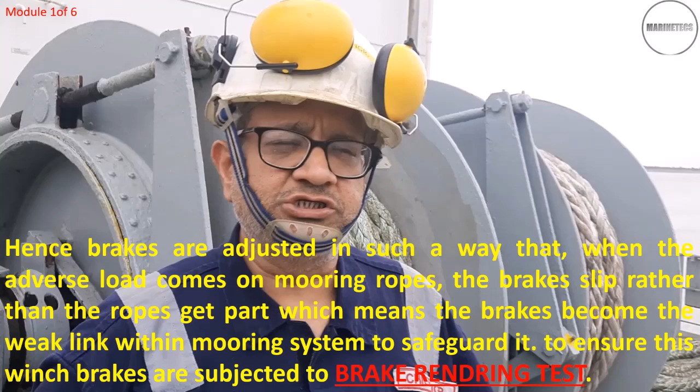As we know, onboard mooring winches are always designed in such a way that they keep your ship in a safe position, and when an adverse or excessive load comes on the mooring ropes, the brake slips rather than the rope getting parted. So these brakes are adjusted in such a way that when this fluctuating or maximum load comes on the ropes, these brakes will slip off rather than part the rope.

So what is winch brake rendering test? Winch rendering test is a calibration of the winch brakes corresponding to minimum breaking load, or also called minimum breaking strength of the rope used in the designing of mooring equipments. This minimum breaking load is also called SDMBL, Ship Design Minimum Breaking Load.

Why is it important to carry out this test? This is done to prevent accidents, to prevent damage to the mooring equipments, and to prevent fatalities if the mooring rope parts.

Module 2. In this module, we will learn about various loads influencing the winch brake rendering load as well as the winch brake holding capacities. These loads are SDMBL (Ship Design Minimum Breaking Load), MBL (Minimum Breaking Load), Design Maximum Brake Holding Capacity, Operational Minimum Brake Holding Capacity, and Winch Motor Rendering, which is also called Maximum Stall.

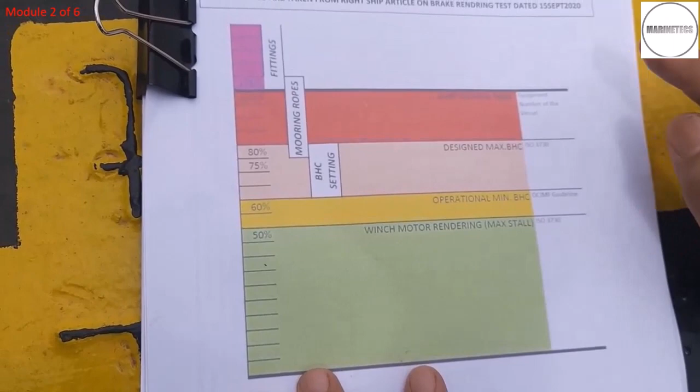Before going for the actual rendering test, we will discuss various loads which govern your winch brake rendering load as well as the winch brake capacity. So the first thing we will discuss is the ship design MBL, also called SDMBL, Ship Design Minimum Breaking Load.

I repeat once again, when the ship is at design stage, class assigns the equipment number to every ship. Then the mooring equipment arrangement manual is prepared, under which this equipment number and ship design minimum breaking strength or minimum breaking load of the rope is mentioned. This minimum breaking load or minimum breaking strength of the rope is the strength of the rope which is used in designing the mooring equipment.

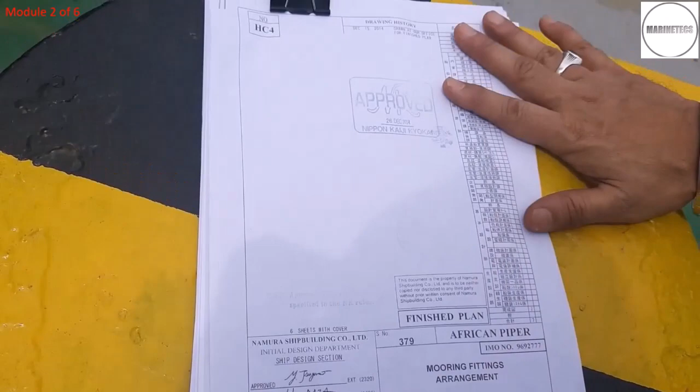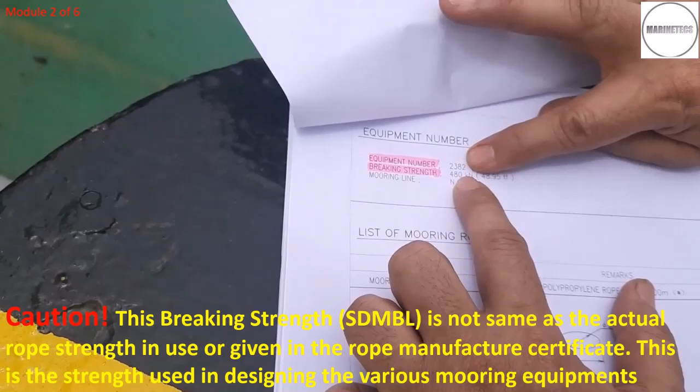So let's have a look. This is the mooring fitting arrangement manual. Here if you turn over, you will find that the equipment number is given here, that is given by the class, and the breaking strength of the rope is given here, 480 kN. You will always find that this minimum breaking strength is not the same as the actual strength of the rope.

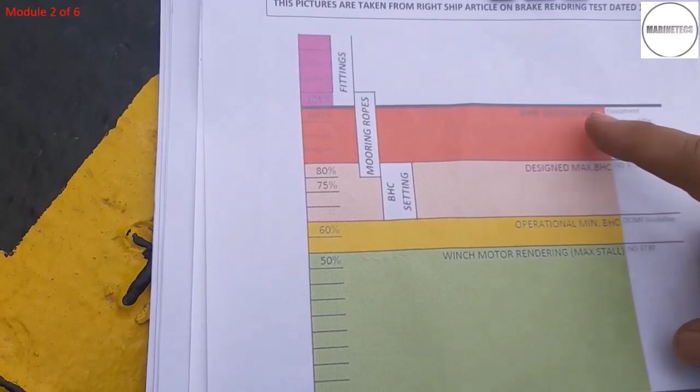This is the strength which is considered for designing the various mooring equipment. Now you will see that in this mooring equipment manual, for each and every fitting, the safe working load is mentioned, the factor of safety, and a lot of things are mentioned in that. Now we understood what ship design MBL is - the minimum breaking load or minimum breaking strength of the rope which is used in the design. We have seen that it is mentioned in the mooring fitting arrangement manual.

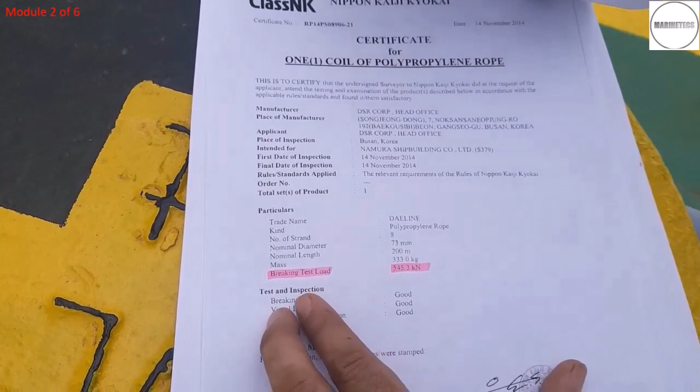Now we go for the MBL. MBL is the minimum breaking load of the rope. This is the load at which the ropes are tested. We can find out this MBL from the mooring rope certificate. This is the mooring rope certificate, and this is the breaking test load, given by the manufacturer. When we talk about MBL, generally we refer to this breaking test load.

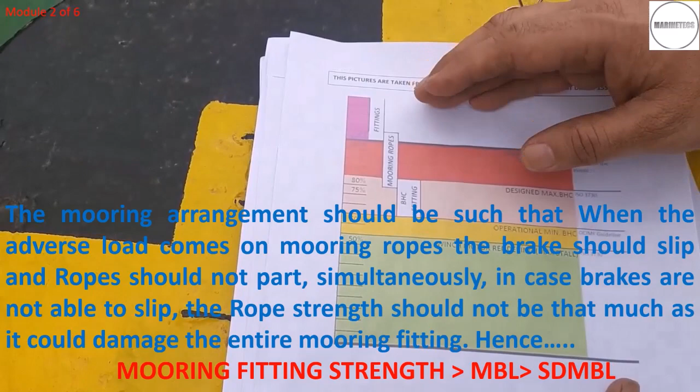Now the relation between the ship design breaking load and the mooring rope MBL is that the mooring rope MBL is almost 5% more than the ship design minimum breaking load, and it can be more than 105%, but it will never be more than the breaking strength of the actual fitting. Because what we need is that when excessive or adverse load comes on the mooring ropes, the brake should slip and the rope should not part. Simultaneously, the rope strength should not be such that the entire fitting fails. So the rope strength is always kept below the strength of the mooring fitting.

Now next is the design maximum brake holding capacity.

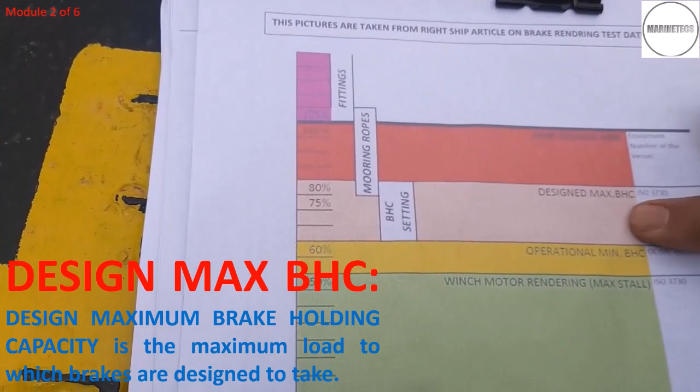The relation between ship design MBL and design maximum brake holding capacity is that this maximum BHC is 80% of ship design MBL. This design maximum BHC is given in the mooring winch manual.

This is the mooring winch specification, and we see the brake capacity of the first layer. This brake capacity is always mentioned with respect to the first layer of the rope which is on the drum.

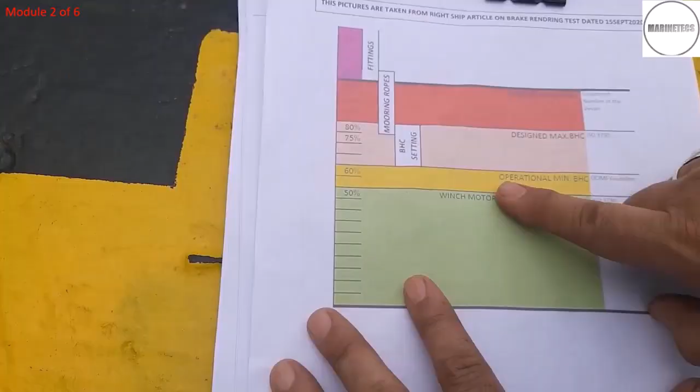This is the operational minimum brake holding capacity. What is that? This is actually the limit of the rendering load. Up till that the brake will hold, and beyond that, if the load reaches, the brake will start slipping.

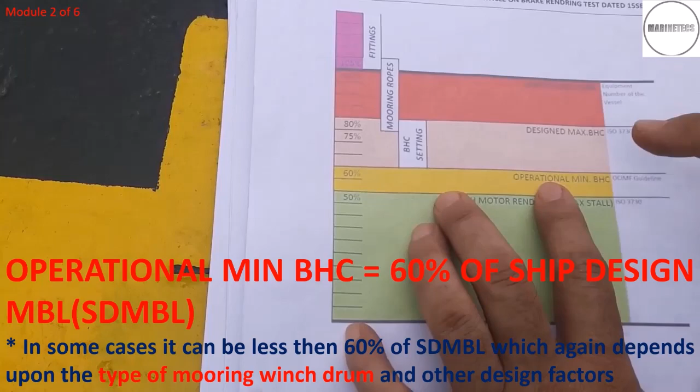This minimum brake holding capacity or rendering load is generally in the range of 60% of the ship design MBL, ship design minimum breaking load. I repeat, it is 60% of ship design minimum breaking load and not 60% of MBL, because MBL is always higher than the SD MBL.

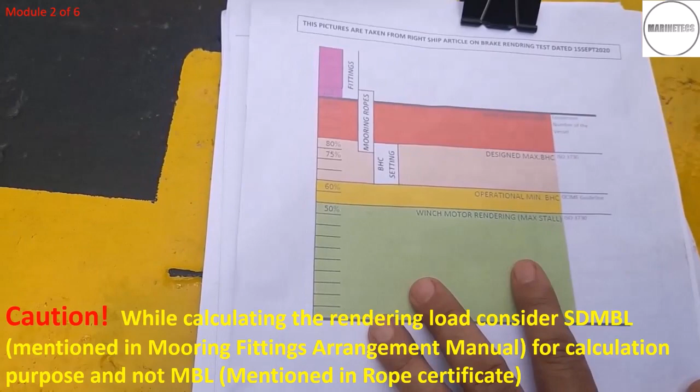Many people make mistakes when they calculate the rendering load. They consider the rope strength, and there the tests go wrong. So we have to take care that instead of considering the breaking load provided by the rope manufacturer, we have to take ship design minimum breaking load, which is mentioned in the mooring arrangement manual.

So next is the winch motor rendering. This is actually the winch motor capacity. Generally you will find a relation between maximum brake holding capacity and this mooring winch load.

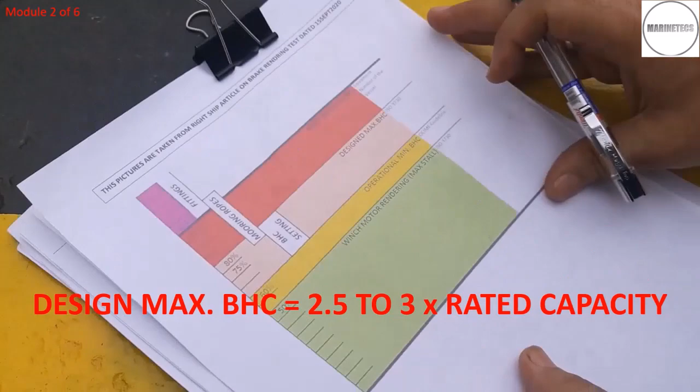These two loads, you will find that this load is almost 2.5 to 3 times of the winch motor capacity. So suppose my winch motor capacity is 98 kilonewton, we will see that it is almost in the range of...

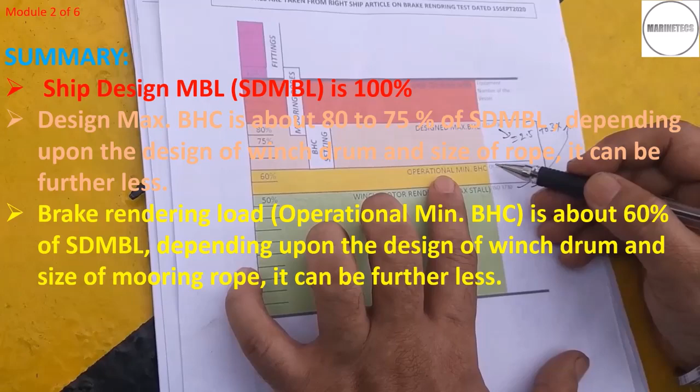So now we have seen various relations: ship design MBL we consider as 100%, then the brake holding capacity of the brake, which is around 80 to 75% of ship design MBL, then the brake rendering load, which is almost 60% of this ship design minimum breaking load, and the winch motor capacity, which is 50% of ship design minimum breaking load, and mooring rope strength is almost 5% more than the ship design breaking load.

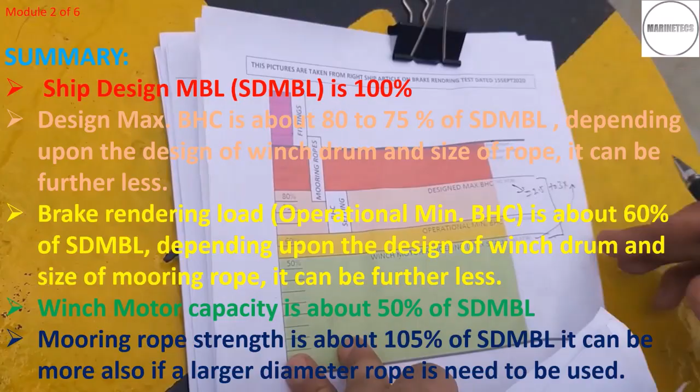So next we will move to the calculation part, how we calculate rendering load.

Module 3. In this module, we will learn about the difference between split drum mooring winches and non-split drum mooring winches.

Calculation for calculating rendering load, which is nothing but the calculation of jack-up force and hydraulic jack pressure used for carrying out the rendering test.

Before switching over to the calculation part, we must ensure what kind of mooring winch drum it is, because calculation of rendering load depends upon the type of mooring winch drum.

As we know, there are two types of mooring winch. One is the divided or split drum mooring winch. Another is the winch which has got the undivided mooring winch drum.

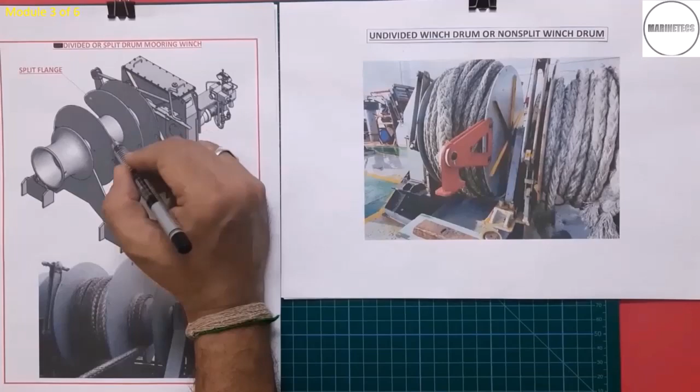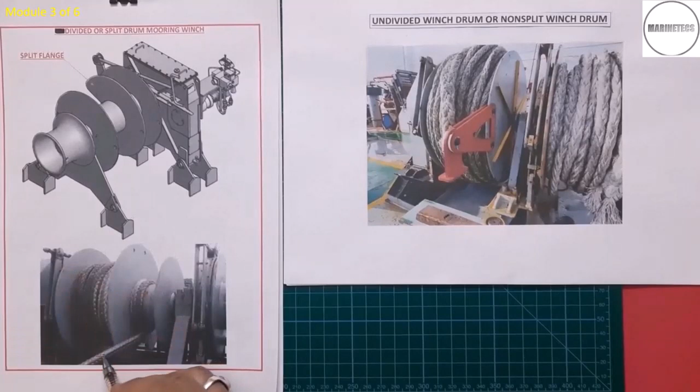In split drum mooring winches, the whole drum is divided with the help of a split flange into two parts. One part stores all the layers of the rope, and the same rope passes through the cut in the split flange, and only a single layer is stored on the other part, and then this rope passes through the fairleads and other mooring equipment, and this span is used for mooring the rope alongside the jetty.

Now in the undivided winch drum, we can see that a number of layers are stored on the whole drum. In this photo, you can see there are two separate drums on a common shaft run by a common motor, but these are not divided drums. This is a single drum, but two single drums on a common shaft.

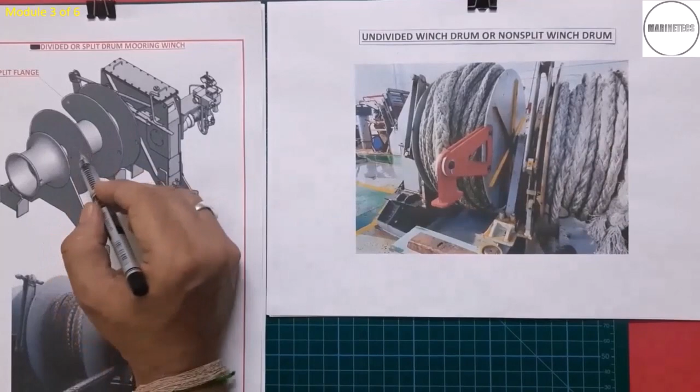Here, this whole drum is divided with the help of a split flange. So this is the common difference between a split drum mooring winch and a non-split drum mooring winch.

Now let's go for the calculation of jack-up force and hydraulic jack pressure in detail.

Rendering load calculation for both the mooring winches are different. In this video, you will understand why the calculation for both the drums are different and why the same calculation cannot be used for both types of mooring winch drums.

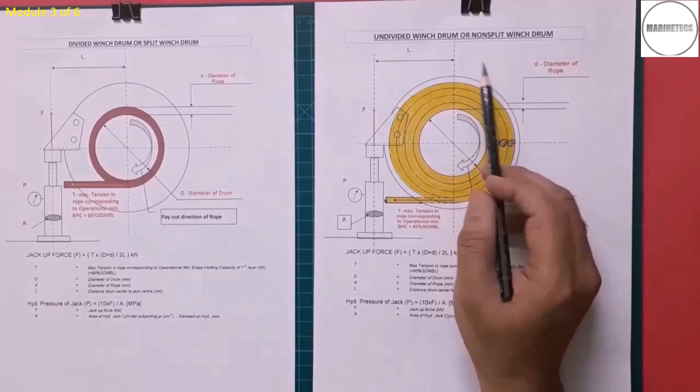As we have seen earlier, in split drum mooring winches, all the time a single layer of the rope on the winch drum is in use, whereas in non-split drum mooring winches, the winch drum is having a number of layers of the rope all the time in use.

So the number of layers of the rope varies depending upon the distance between the mooring point alongside to the ship. If the distance between the mooring point alongside and the ship is more, then there will be less number of layers of the rope on the mooring winch drum, and if the distance is less, then there will be more number of layers of the rope on the mooring winch drum. Now come to the calculation part.

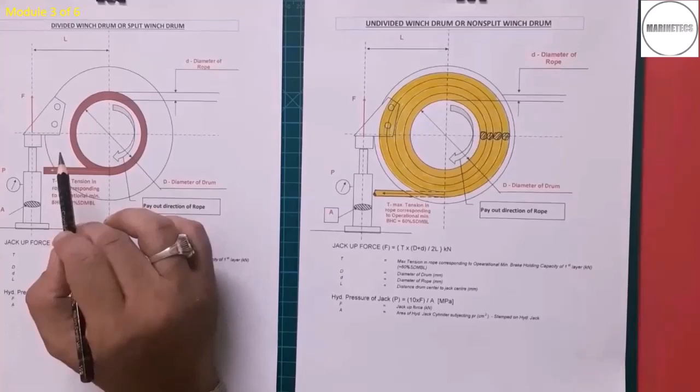The calculation is done to calculate the required hydraulic jack pressure and jack-up force in advance to carry out the winch brake rendering test. That will help in deciding at what point the brakes are rendering, or whether the brake tightening indicators are required for adjustment or not.

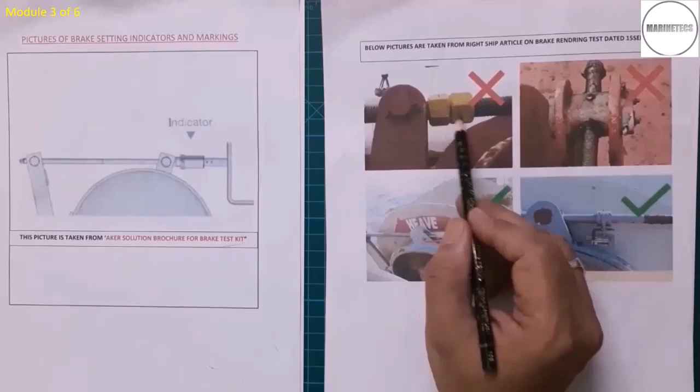Now these indicators need to be tightened or adjusted according to the outcome of the winch brake rendering test. These indicators should not be put in this region, as it may hamper the normal working of the brakes. Here it is shown that these kinds of lockings have been put in this region, hence not acceptable, and it may impair the normal working of the brakes.

And also, if you require to tighten these brakes further, it may not allow you to tighten further.

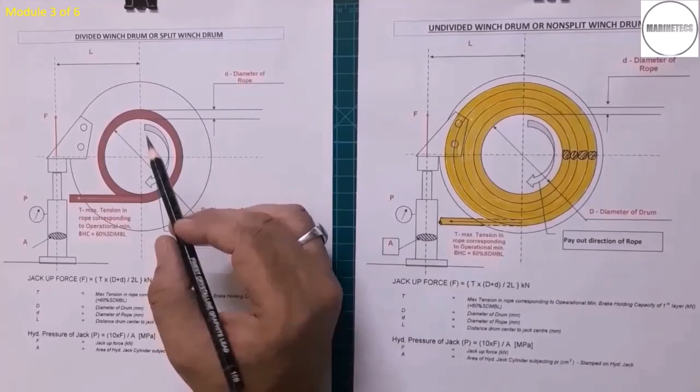These pictures show the arrangement of carrying out the winch brake rendering test on split drum mooring winch and non-split drum mooring winches. Let's understand with the help of a force lever diagram how we derive the formula for jack up force and hydraulic jack pressure.

This is a split drum mooring winch on which a single layer of rope is in use. This is the winch drum, shown here in this split drum mooring winch. This is the drum on which a single layer of the rope is always in use. Here you can see it is a single layer of the rope.

So this is my winch drum. Here is a single layer of the rope in use all the time. This is the payout direction of the rope. This is the split flange of the winch drum.

This is the special tool for carrying out the winch brake rendering test. This tool is provided by the yard or the maker. This is the hydraulic jack, with the help of which we apply the required jack up force to carry out the winch brake rendering test.

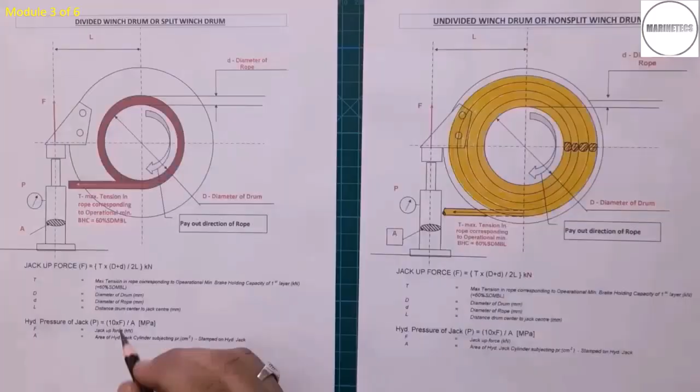Now come to the force lever diagram. This is my fulcrum point, and this is my lever. Around this fulcrum point, this winch drum rotates. When the system is in equilibrium and the brakes are tightened to the required point, there is no movement in the lever and no movement in the winch drum.

The rope tension acts downward, and in that condition the brake force acts opposite to that downward force. So in this condition the system remains in equilibrium.

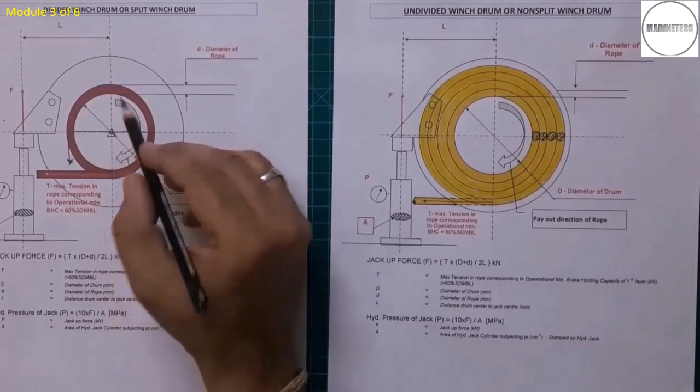Suppose the tension in the rope at any time is TR, and this brake force is FB. Here we have got a lever available, which is capital D plus small d by 2. Capital D is the diameter of the winch drum, small d is the diameter of the rope.

With the combination of this lever and the rope tension, a torque is generated in this winch drum which tries to rotate this winch drum in the clockwise direction, which will be opposed by this winch brake force.

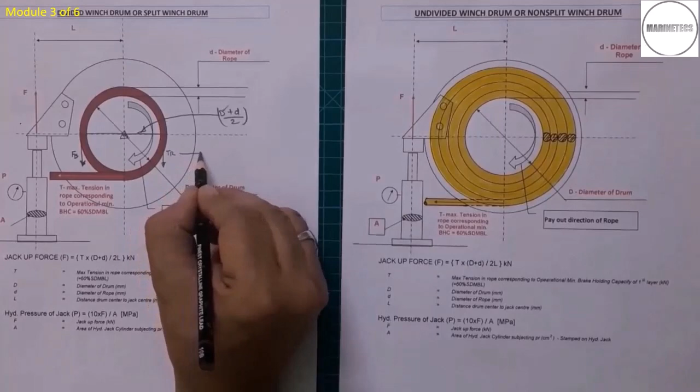Now, how much maximum torque is counteracted by this winch brake before slipping? Suppose before slipping my TR becomes T, where T is the maximum tension corresponding to the operational minimum brake holding capacity. As we know, with the help of this diagram we understand that my winch brakes are to be tightened to 60% of ship design MBL, that is ship design minimum breaking load, and this is the operational minimum brake holding capacity up to which my brakes are to be adjusted.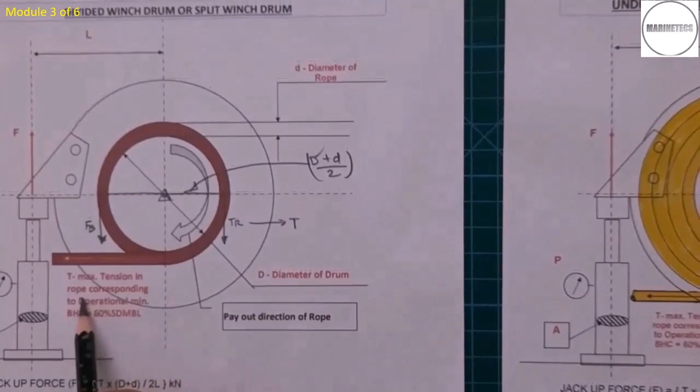This is 60%, this is 100%. So here TR becomes T, which is the maximum tension in the rope corresponding to the operational minimum brake holding capacity, which is equal to 60% of SDMBL.

So how much torque is generated due to this maximum tension, that I will write here. Suppose this torque is torque 1. So torque 1 equals T into D plus d by 2. So this much torque will be counteracted by the winch brakes before slipping.

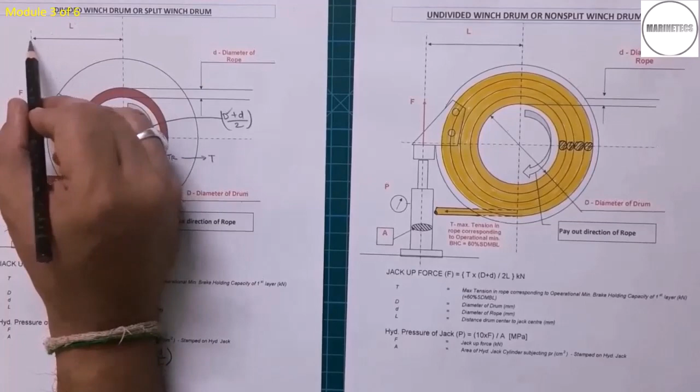Now I carry out the winch brake rendering test. For that, I tighten my brake to the required point, put this special tool and hydraulic jack, and pressurize this jack to the required hydraulic jack pressure to put a force here and make the winch brakes render. L is the lever available, which is nothing but the distance of the jack center and the winch center.

So before slipping, how much maximum torque will be counteracted by the winch brakes, that I will write here. Suppose this maximum torque which is counteracted by the winch brakes before slipping is torque 2.

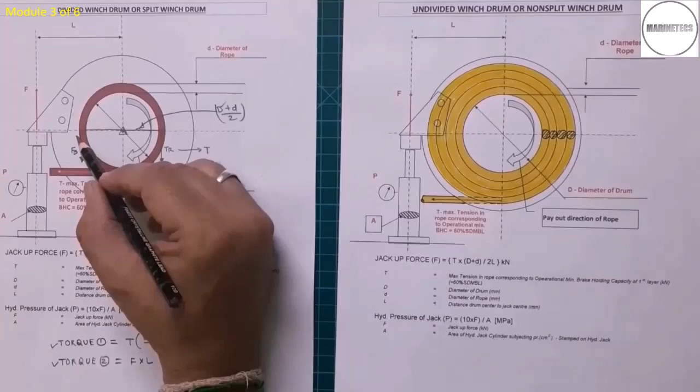Become F into L. Now both torque 1 and torque 2 are the maximum torque faced by the winch brakes just before slipping. So I can equate torque 1 and torque 2. Torque 1 equals torque 2. So here I write T into D plus d by 2 is equal to F into L. If I simplify it, I can write F is equal to T into D plus d by 2 into L.

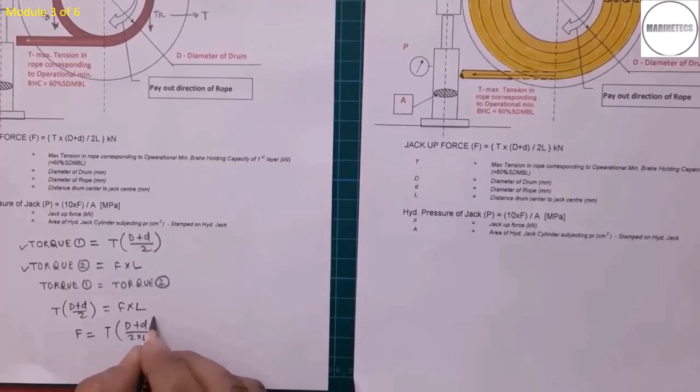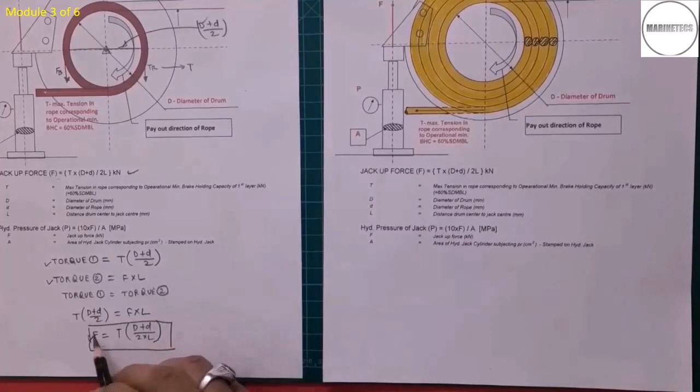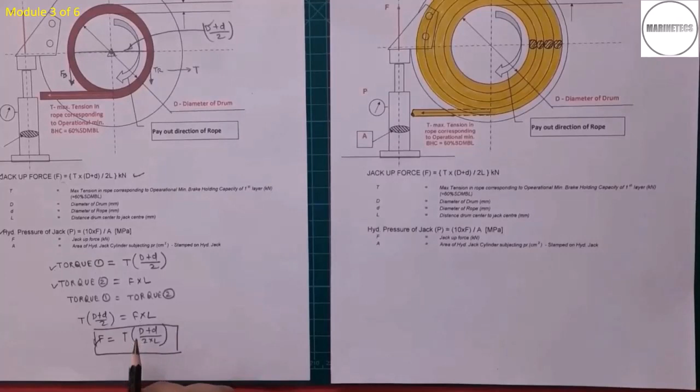If you see this formula and the jack-up force formula, they are the same. Now you understand how we derived this formula. To convert this jack-up force into pressure, we use pressure equals force upon area, and with that we can calculate the required hydraulic jack pressure to carry out the winch brake rendering test. In this formula all the parameters are known in advance, hence calculating the jack-up force is easier. Capital D, the winch drum diameter, is known, small d is known, L can be measured, T is the maximum tension, corresponding to 60% of SDMBL, which we know. Hence jack-up force calculation is easier. In this arrangement, the point of rendering of brakes can be calculated in advance, and the brake can be adjusted according to the outcome of the brake rendering test.

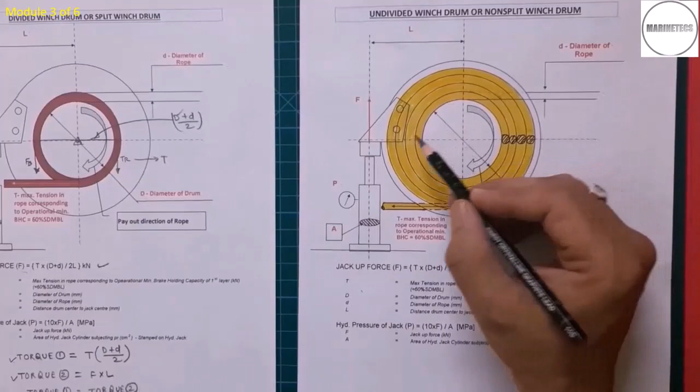Now come to the non-split drum mooring winches. Here the arrangement to carry out the winch brake rendering test is similar to the split drum mooring winches. The only difference is that in split drum type mooring winches, only a single layer of rope is always in use. Because of this, the lever available to generate torque in the winch is fixed, and the operational winch brake holding capacity is also fixed. In non-split drum mooring winches, a number of layers of rope are always in use, and these number of layers can vary depending upon the distance of the ship from the mooring point alongside.

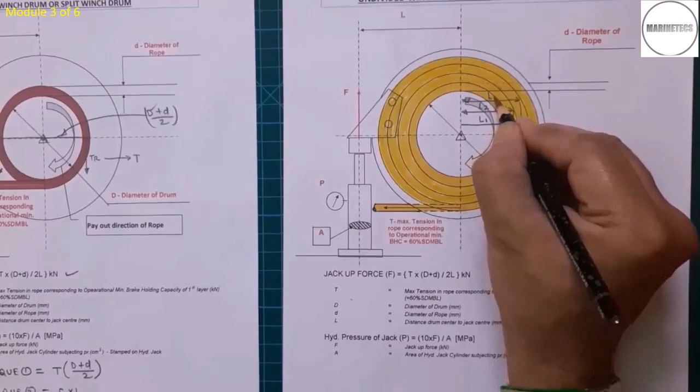Now suppose I name this layer 1, this is layer 2, this is layer 3, this is layer 4. With the help of the force lever diagram, we see that this is the fulcrum point around which the winch drum rotates. This is the lever available with respect to layer 1, also called the first layer, which I name L1. This is the lever for the second layer, this for the third layer, and this for the fourth layer. So here we have 4 layers, and 4 different levers: L1, L2, L3, L4.

We'll write the value of these levers here. L1 is equal to capital D plus small d, by 2. L2 is equal to D plus 3d by 2. L3 is equal to D plus 5d by 2. L4 is equal to D plus 7d by 2. So L1 is smaller than L2, L2 is smaller than L3, and L3 is smaller than L4. Here we see that the lever increases with the number of layers on the winch drum.

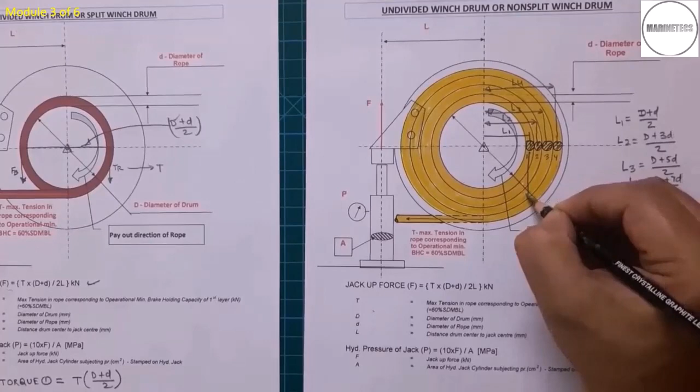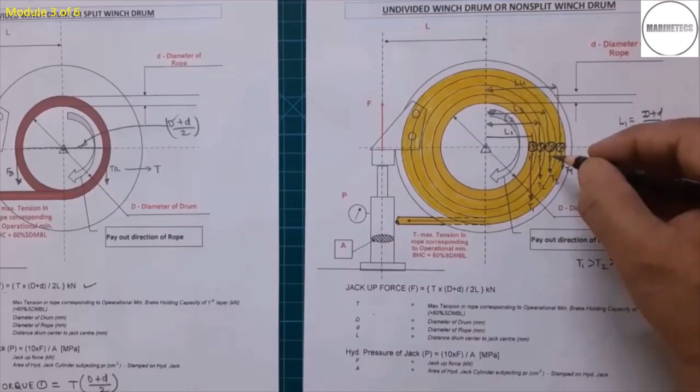Tension in these layers are different. This is tension T1 acting downward, tension T2 on the second layer acting downward, tension T3 acting downward, tension T4 acting downward. These are the maximum tensions in the layers of rope just before slipping of the brake. So T1 is greater than T2, is greater than T3, is greater than T4. Now to counteract the torque generated by the tension in the rope, my brake force acts downward. I have tightened my brakes to a fixed point and the brake force will act downward. Suppose this brake force is FB.

Now to keep the system in equilibrium, my brake will be subjected to different loads. So when the number of layers is less, the brake is able to hold the maximum load. If the number of layers increases, the same brake, tightened to the same point, is able to take up lesser load in the rope. This is my lever for the brake, you can say. So when the number of layers increases, the brakes render at a lesser load, and when the number of layers reduces, the brakes render at a greater load.

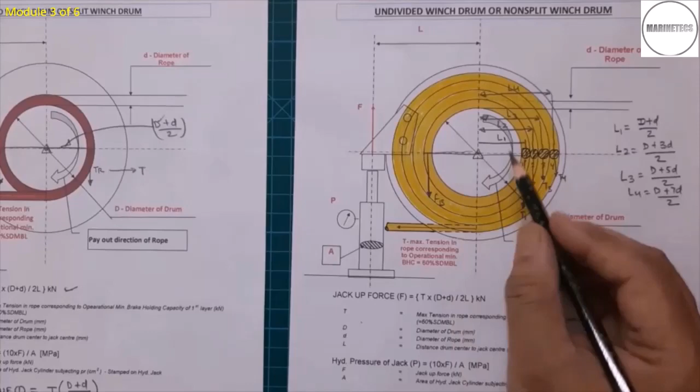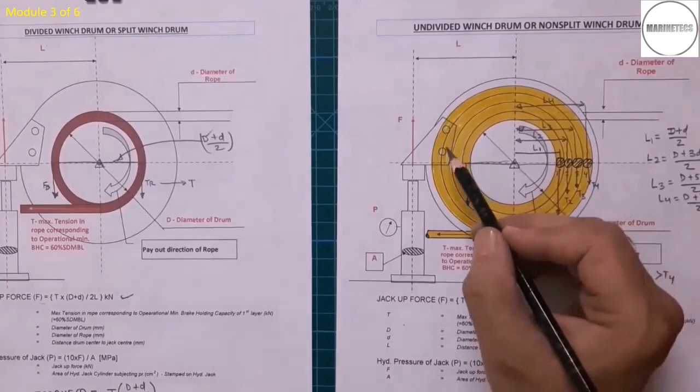Hence in this arrangement we cannot fix our operational brake holding capacity, because the lever is continuously changing with the change in number of layers, and it is very difficult to find a fixed point where I can say the brake should be tightened up to this point. Because of this, the required jack-up force and hydraulic jack pressure cannot be pre-calculated using the same method as for split drum mooring winches. For calculating the jack-up force and hydraulic jack pressure, we have to approach the yard or the maker. They will suggest how many layers of rope to use for the calculation purpose. They may also suggest a factor of safety to be put in the calculation, or another way of doing the calculation for the jack-up force and hydraulic jack pressure.

Since in this arrangement the operational brake holding capacity is not fixed, we cannot put any brake tightening indicators which tell us the brakes are to be tightened up to that point. Moreover, you will not find any brake tightening indicators in these kinds of mooring winches which require adjustment or calibration.

Module 4. Now let's have a look how the winch brake rendering test is carried out.

Make sure necessary risk assessment has been carried out before performing this test, and the person doing the test is fully aware of the system in order to prevent accidents and damage to the mooring equipment.

If the brake capacity is more than the breaking limit of the rope, there might be chances that the rope may break instead of slipping off the brake. So brakes are always designed to slip at the maximum load.

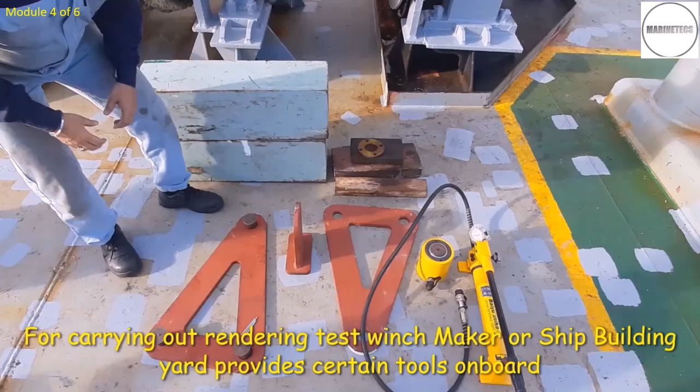Makers or the yard supply certain tools for checking this. Winches are provided with a facility so that these tools will be fitted in this place. These holes are provided to fit the tool, and with the help of this jack, we will give the load required to make the brake slip.

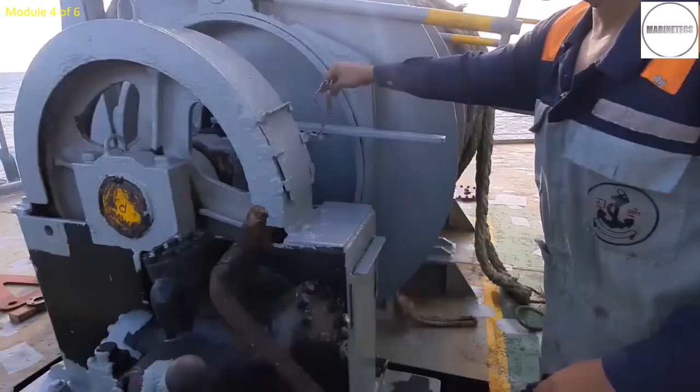So let's see how this rendering test is carried out. We'll first take these holes in position so that we could fit our tool.

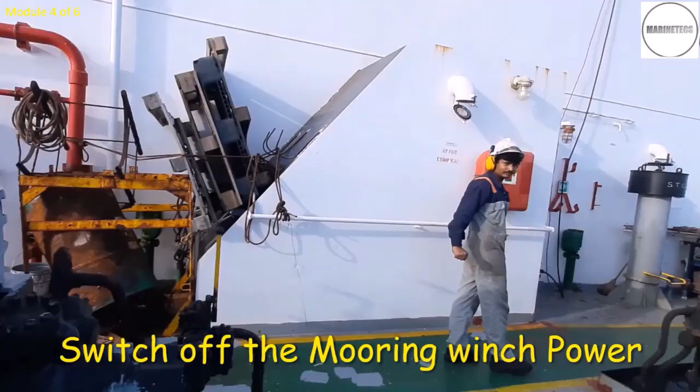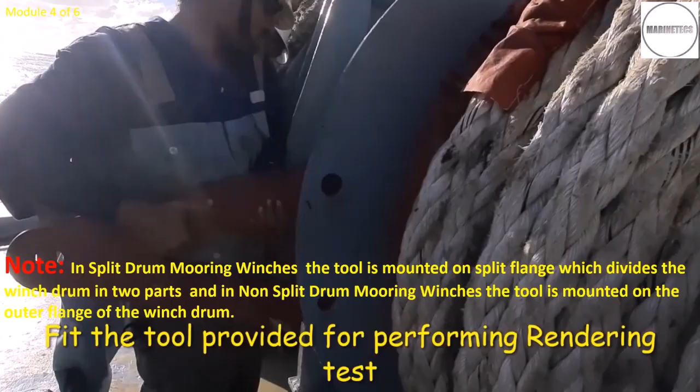Some more. Okay. Lock it. Disengage. And tighten the brake. You can switch off the pump now. Pin, keep the pin ready.

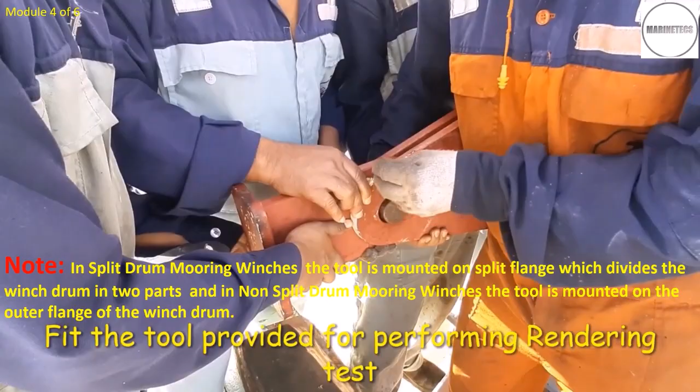Okay, so now this tool is fitted. Now take these packings in position. Now put the jack.

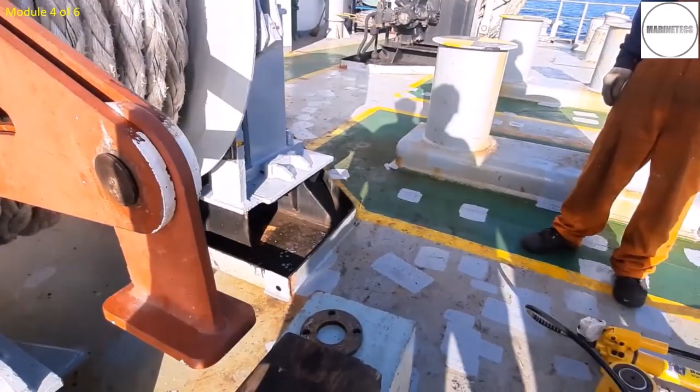While putting the jack, you have to make sure that there is not much clearance between jack and the tool. Otherwise, you may not get the full force of the jack on the tool, and it may mislead the result. Make sure the jack is in the correct position, exactly in the center of this pin.

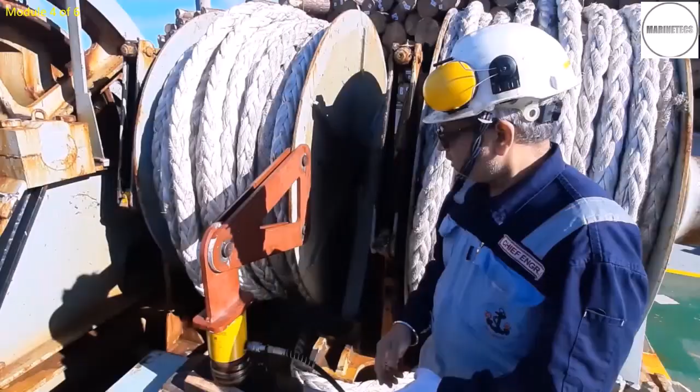We have to measure the distance between this center and the center line of the shaft of the winch. For measuring that, we can use this measuring tape. Make sure now the brake is fully tight.

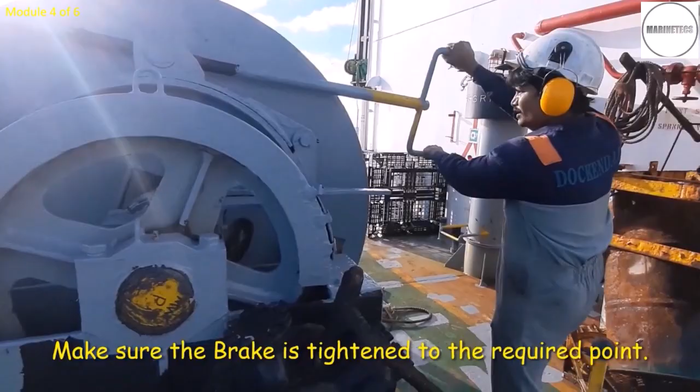Now we'll put a mark on the brake so that we'll know when it starts slipping. Before putting the hydraulic jack, make sure the pump is already filled up with hydraulic oil and there is no air in the system.

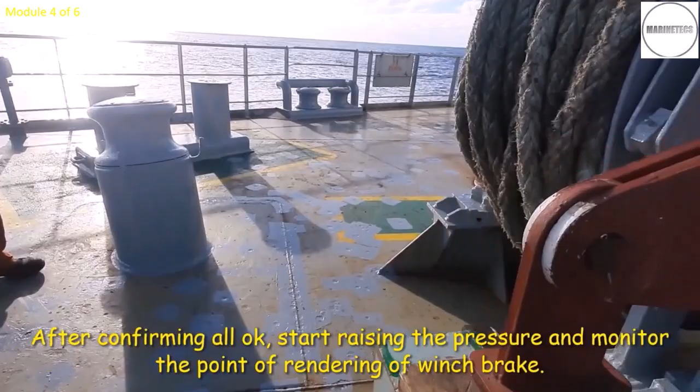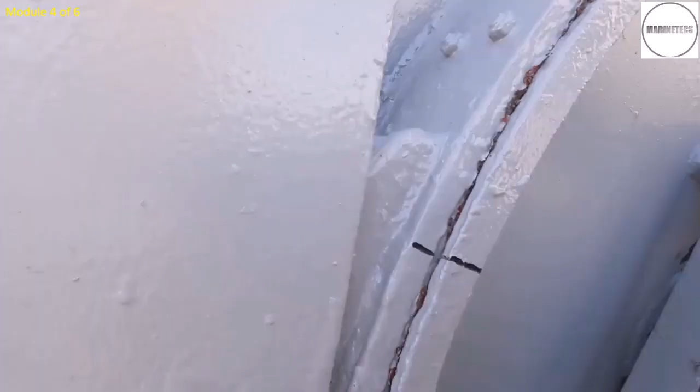Okay, raise the pressure. Raise. Okay, raise. Now I think start. Okay, raise.

Slipping. Okay, slip. It's not going anymore. So you will see that even with the number of pumping, the pressure is not increasing that much. That means the brake has started slipping.

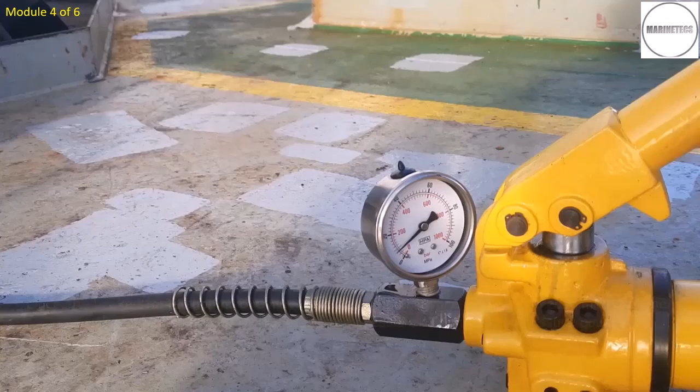So now we can read our pressure as around 80 bar. This is finished with the rendering test, and now we will enter this pressure in our table and we'll see how much percentage of brake capacity it is. This will give a fair picture of whether the brake needs to be adjusted or not.

We'll see it later on after putting this value in our calculation sheet. Release the pressure, remove the jack and remove the tool, and make the system normal.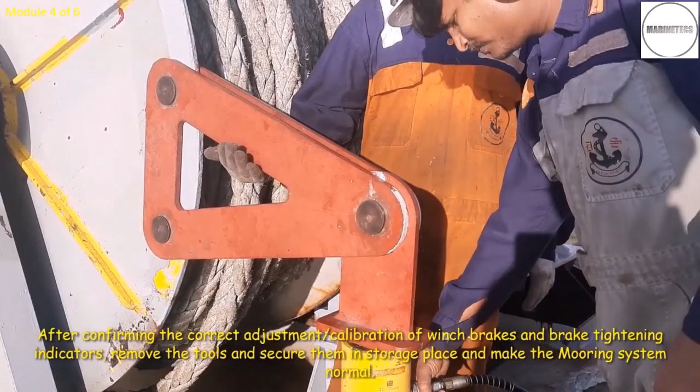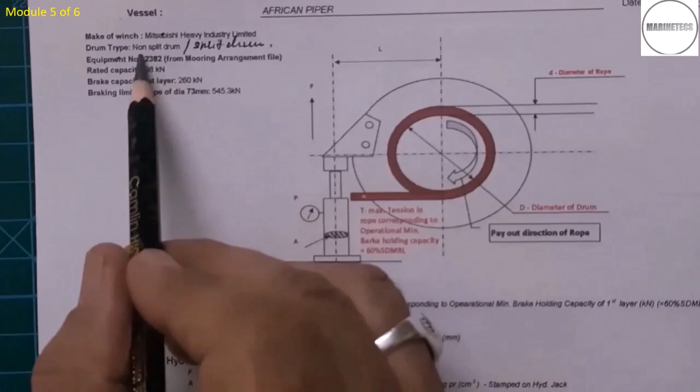Now come to the report part. This is my report of the mooring winch brake rendering test. Here we write the ship name, date, and the make of winch, drum type, whether non-split drum or split drum type, and equipment number.

Equipment number we can find out from the mooring fitting arrangement manual. Here it is equipment number 2382. This is the rated capacity.

This we can find out from the mooring winch manual. Brake capacity of the first layer, this also we can find out from the mooring winch manual. Brake limit of the rope, that we can find out from the rope manufacturer's certificate.

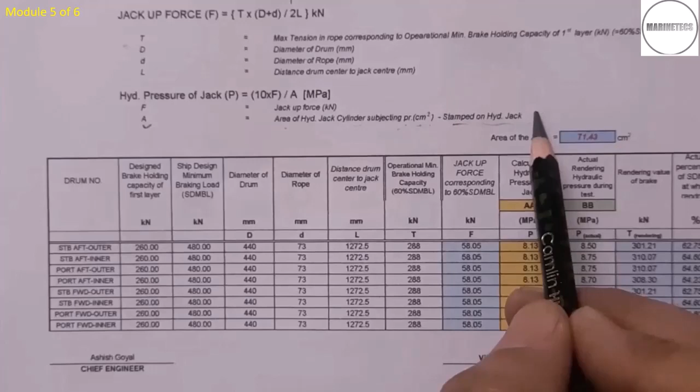This calculation part we have already seen in the earlier video. Here I would like to mention that area A is the hydraulic jack area which is under pressure. This is stamped on the hydraulic jack, so we can directly take this value from the hydraulic jack.

So now come to this table. Here is the drum number. Each mooring winch drum is identified, so we have tabulated our mooring winch drums here.

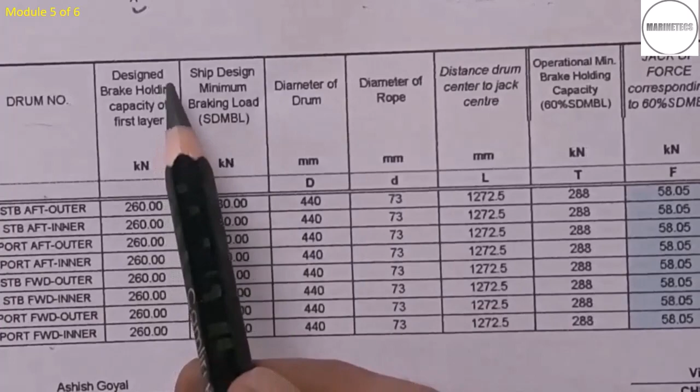Now this is the designed brake holding capacity of the first layer. As we know, all the brake holding capacities are mentioned in the mooring winch manual with respect to the first layer, so we have tabulated it here. Though this parameter is not contributing to any calculation, just for reference purpose we have written it here.

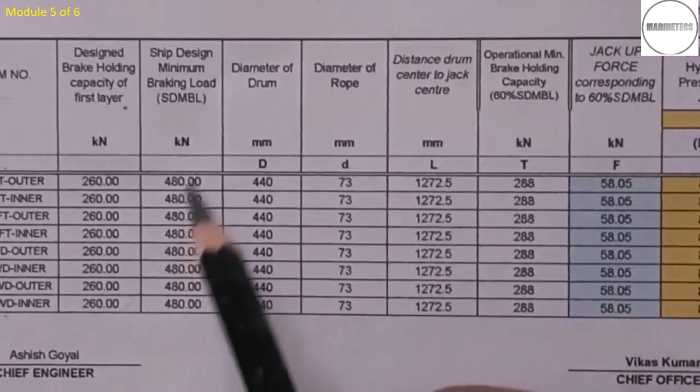Ship design minimum braking load, also called SDMBL, we can find from the mooring winch fitting arrangement manual. As we know, this is the mooring fitting arrangement manual. Braking strength 480, this is my SDMBL.

So here I have written SDMBL as 480 kilonewton. Diameter of drum 440, that is from the mooring winch manual we can find out. Diameter of rope also we can find from the mooring winch manual. Distance drum center to jack center, that we can measure with the help of the measuring tape.

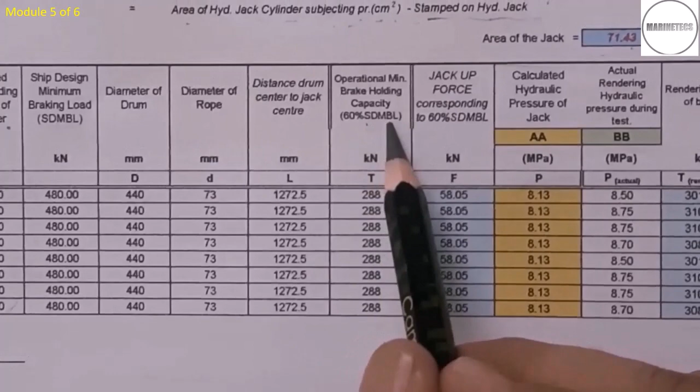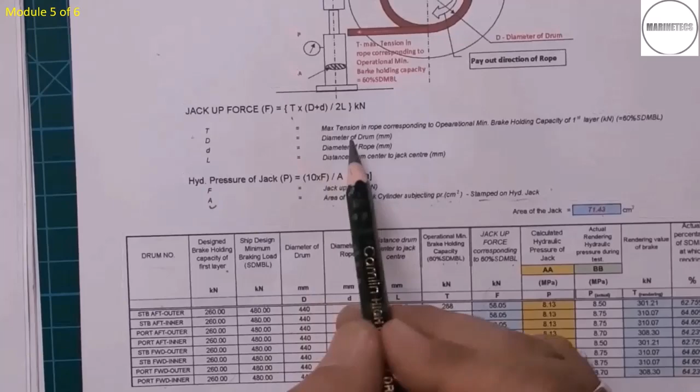Operational minimum brake holding capacity, which is 60% of SDMBL, means this value is 60% of that value. Now the jack-up force corresponding to 60% SDMBL, with the help of this formula we have calculated this jack-up force, where T is the maximum tension in rope corresponding to the operational minimum brake holding capacity.

This operational minimum brake holding capacity is this value. Now with the help of this formula, we have calculated this hydraulic jack pressure.

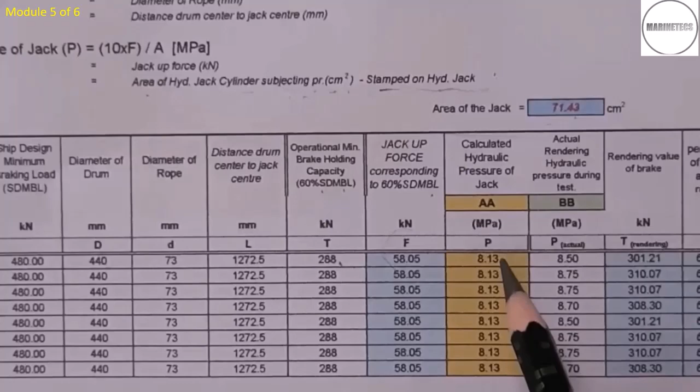After calculating this part, we carry out the winch brake rendering test. We see that the brake should hold at least up till this point. If it is slipping before, we have to adjust such that it should hold up till this point, or if it is not slipping at this point, we have to raise the pressure beyond this and check at what point the brakes are rendering.

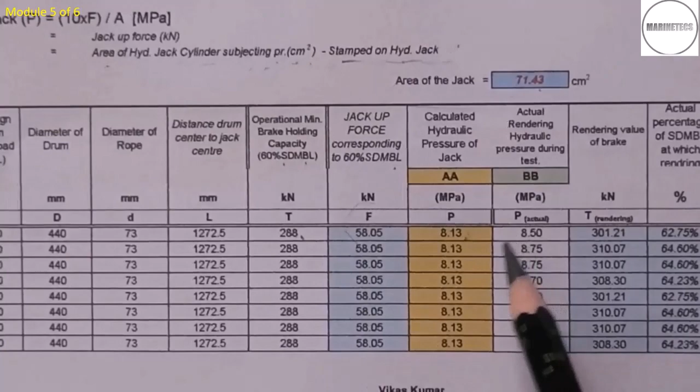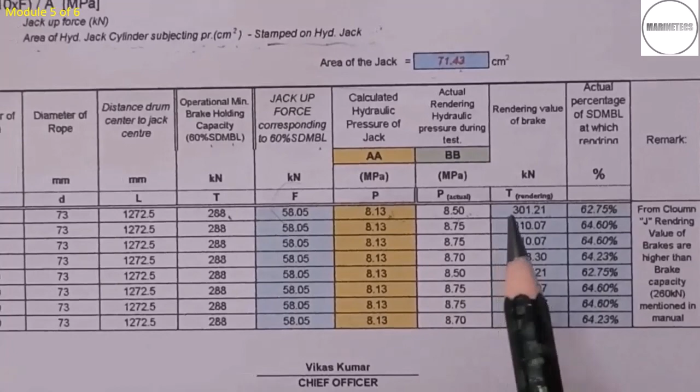In this condition, the brakes are rendering just above this pressure. Now we have converted this pressure again into force, found out how much force it is exerting, and now comparing this force with the SDMBL, calculating what percentage of SDMBL this force is. So my brakes are slipping at 62.75%. We can see that my brakes are slipping just near the calculated jack up force or hydraulic jack pressure, so this test result is correct.

Now after tabulating everything, we prepare the report and send it to office. After carrying out the winch brake rendering test, we stencil this value on the respective mooring winch drum.

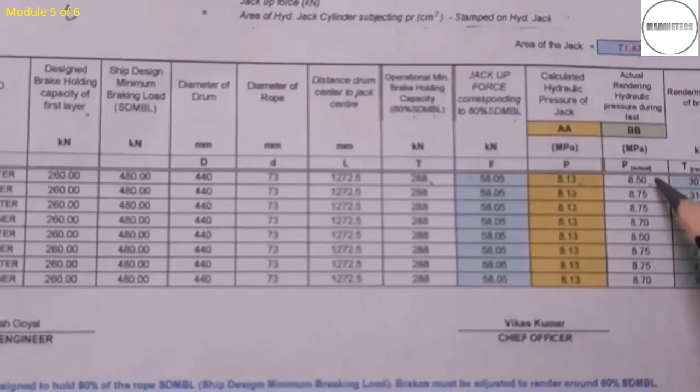Module 6 is summary. In this module, we have highlighted all the main points for carrying out the rendering test in a safe and correct manner.

Again, first make a risk assessment. Second, check what kind of mooring winch you have on board, whether it is split type or non-split type. If it is a split type mooring winch, use the same calculation as shown in this video. If it is an undivided drum or non-split type mooring winch and the procedure of rendering test is not on board, please contact the maker or the yard.

They will provide you the full info for carrying out this rendering test. We have to always take care that there is a difference between the calculation of undivided drum and split drum. Third thing, you must know there is a difference between the MBL and the ship design MBL.

A common mistake people make is they consider MBL, minimum breaking load provided by the rope manufacturer, for calculating the rendering load. That is not correct. For calculating your rendering test, always take ship design minimum breaking load, which is mentioned in the mooring equipment manual. And fourth, what people mistake is that when the calculated hydraulic jack pressure has reached and brakes are still holding, they consider that the rendering test is over.

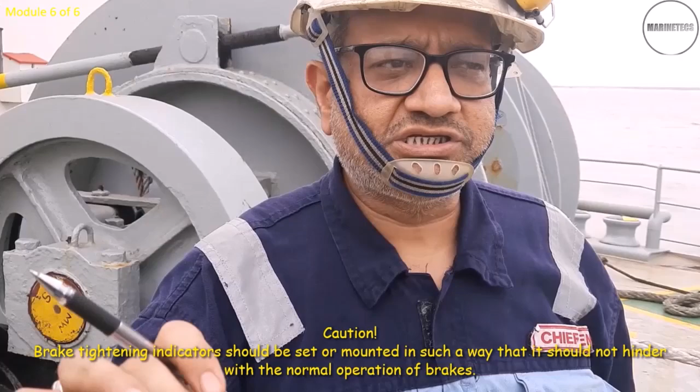And finally, the indicator should be set in such a way that it should not hinder the normal operation of the brake. So that's how you can carry out the whole rendering test on the mooring equipment, and keep your equipment in a safe manner.

Make the report and send it to your office. Office may also take the advice of the maker or the yard on whether these tests have been carried out properly or the values are okay or not.

And if you want further information, you can refer to a few articles on the internet, like there is an article from RightShip on the winch brake rendering test. There is information on the OCIMF site, Oil Companies International Marine Forum site. They suggest Mooring Equipment Guidelines 4 for carrying out the rendering test on these equipment. So I think if you follow these guidelines, you can correctly go for the rendering test, and keep your equipment in a healthy and safe condition.